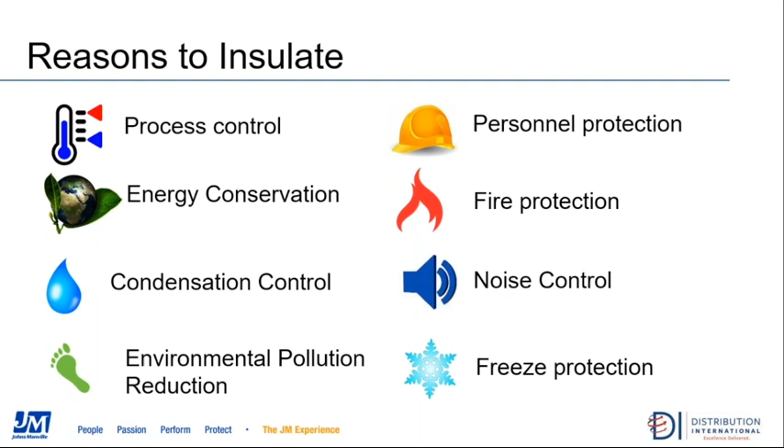That's also the reason why we have so many different products on the industrial side. If there was one product that did everything, man, we'd have it, but there is no silver bullet. So we have various materials because there is no one single product that will serve every single application. So we have to have a number of products because that's simply the way it is.

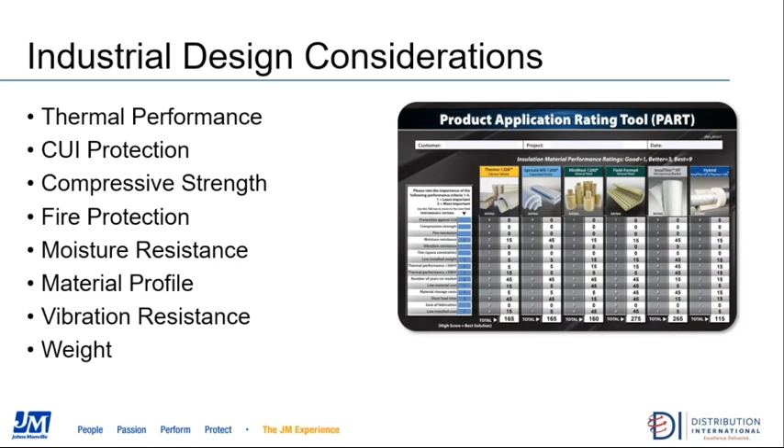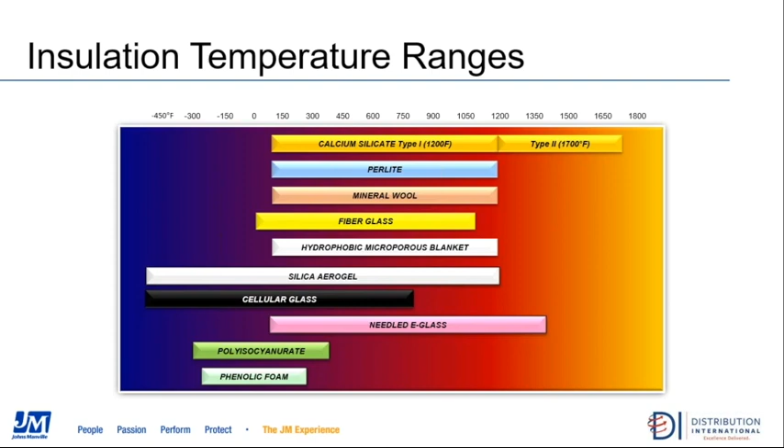This slide here is a chart that really illustrates pretty much all the industrial insulation materials available on the market today, from the cryogenics to the hot, and the top 5: calcium, perlite, mineral wool, fiberglass, and hydrophobic microporous blankets. Those 5 materials JM supplies in one form or another. And you can see we're not in the cryo side of the business. We are focused on the hot insulation products.

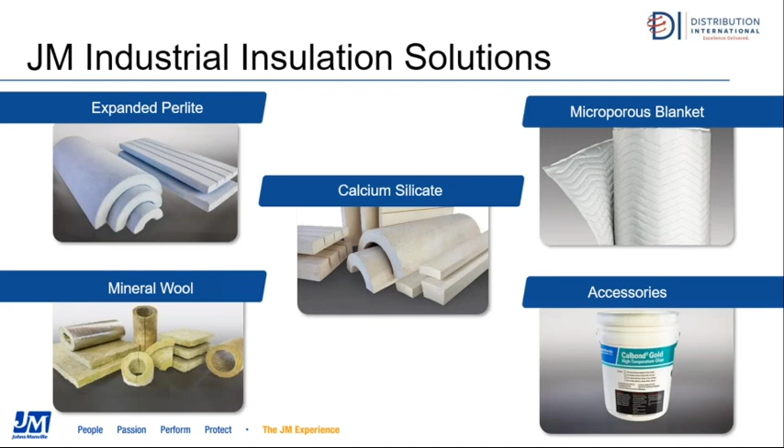So the products we offer are listed here: perlite, calcium, microporous blanket, various shapes and sizes of mineral wool, and we also have some accessory products, glues and cements.

So let's start with calcium silicate. Thermo 1200 is our flagship product. We've been in the calcium silicate business for more than 40 years, and we have two factories, Ruston, Louisiana, and Fruita, Colorado.

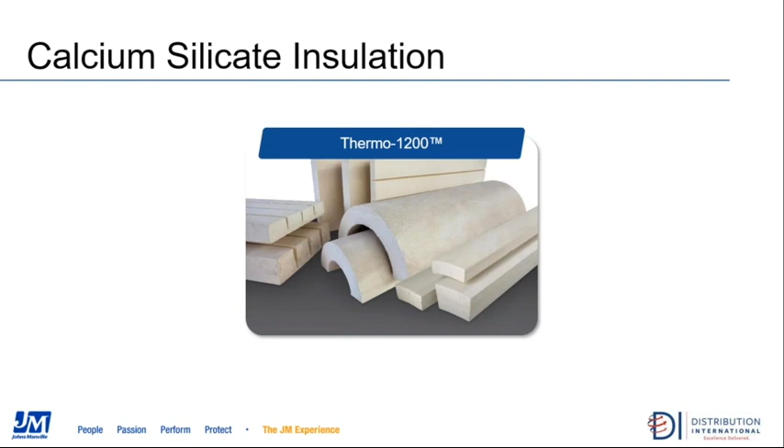The advantages of calcium silicate, historically, have centered on its strength, its compressive strength. It's the strongest material on the market today as far as being able to take a beating, to be stood on, walked on, which you're not supposed to do, but everybody seems to do. Its other advantage is consistent thermal performance, and you get that from compressive strength. If you don't reduce the thickness by squeezing or compressing it, you maintain consistent thermal performance.

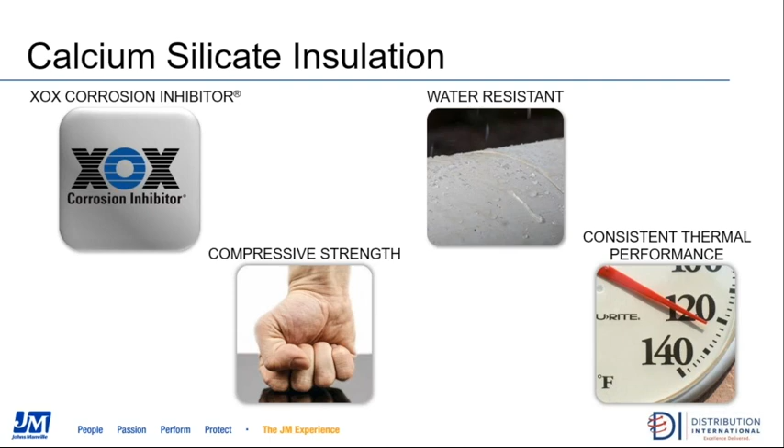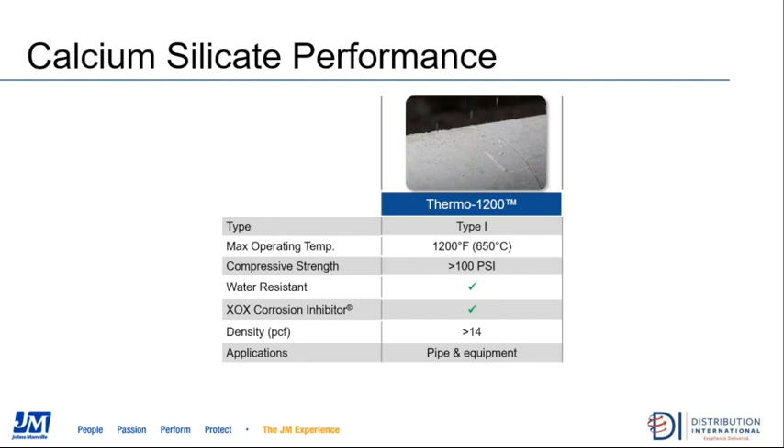Recently, we've added other advantages: a corrosion inhibitor, and most recently, we've made it water resistant. This slide is pretty much a summary of what I've already talked about. The only things I haven't mentioned are that all of our industrial insulation products are rated to 1200 degrees, and the density of Thermo 1200 is 14 pounds per cubic foot.

The insulators could always insulate a pipe faster than the metal jacketing guys could come behind them and install the jacketing. So particularly on the Gulf Coast, the afternoon comes, you get that 2 o'clock rainstorm, and the insulators are way down, far ahead of the jacket guys, and a mad scramble starts when the rain comes to put visqueen over it so it doesn't get wet. Job stops. It's a productivity problem.

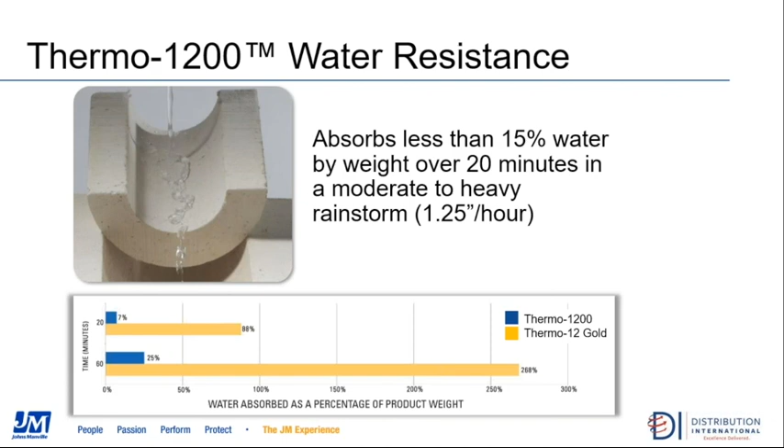So we've made it water resistant so it'll withstand a moderate rainstorm for up to 20 minutes and absorb less than 15% water, whereas prior to making it water resistant, it would absorb 88% water, which is what that first bar chart shows. This was a really significant advantage, designed for the contractors, but what we found is the engineers like it way more than I thought, and they're actually specifying water resistant Thermo 1200.

The other significant advantage is this corrosion inhibitor, which is in our calcium silicate. By the way, we don't make two calcium silicates now. You can't order it without the corrosion inhibitor, and you cannot order it without the water resistance either. We only make one, and it comes water resistant with the corrosion inhibitor. We don't make the old style anymore. The corrosion inhibitor is integral to the product.

Very simply, it provides a buffering layer between the pipe and the insulation, which inhibits corrosion from happening on the pipe. We have a whole 30-minute presentation that goes into great detail on how this actually works, but very briefly, it provides a buffering layer between the insulation and the pipe, so it breaks the connection that you need for water and electrolytes to contact the pipe to allow corrosion to happen.

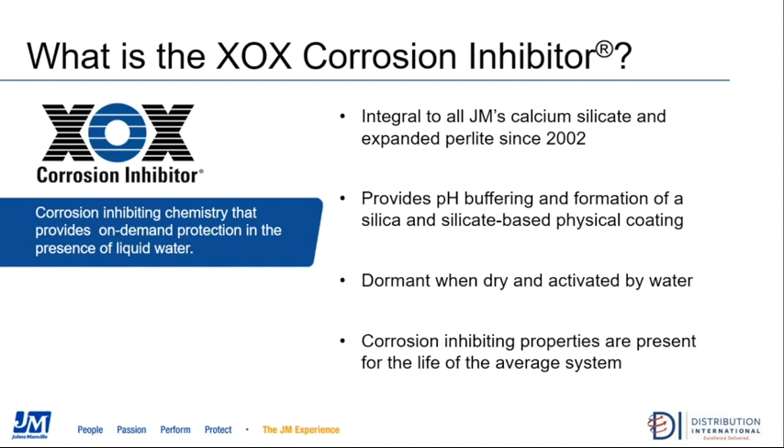This corrosion inhibitor is there for the life of the insulation installation. So if the pipe's insulated with Thermo 1200 for 25 years, that's how long the corrosion inhibitor properties are there. It doesn't wear out, it doesn't wash out, it's there for the life of the system.

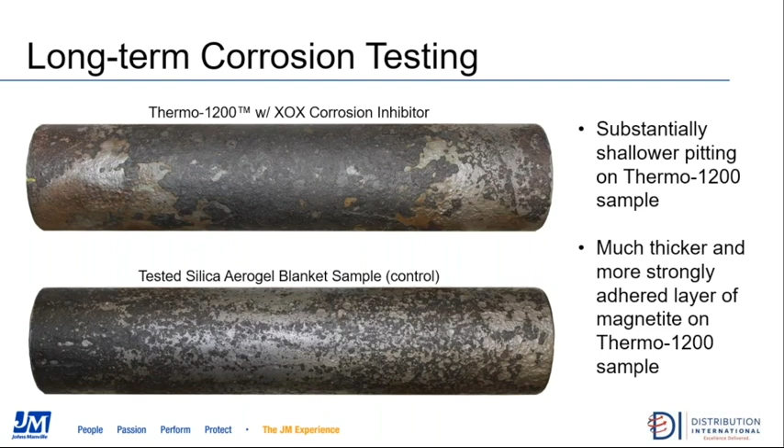These are pictures of some long-term testing we've done. You're going to see similar pictures throughout my presentation because we've done the same test for calcium perlite and our Insulthin blanket. This is 600 cycles, hot and wet, over a 6-month period. With corrosion, what you're looking for is how deep the pit is, because that's reducing the wall thickness of the pipe. The result is Thermo 1200 resulted in much shallower pitting than what we tested against, in this case, silica aerogel. That's the key, that's what everybody's looking for, that's what all the end users are interested in: the depth of the pit. So that's the big takeaway from this slide.

Next product, expanded perlite, which is our Sproule. And again, it's 1200 degrees, the upper temperature limit.

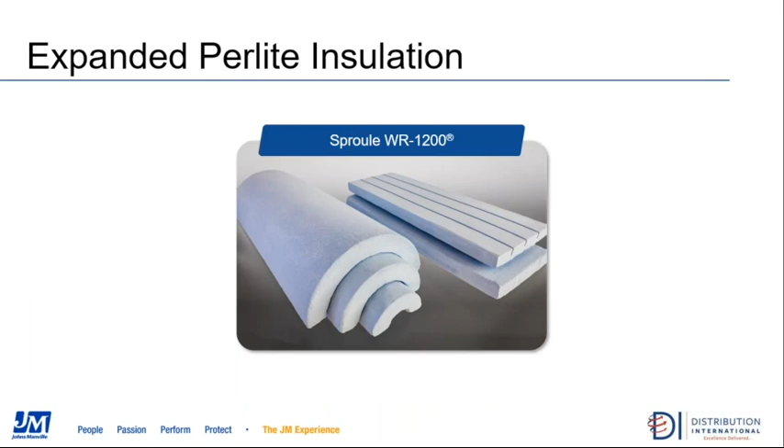Advantages are it's got the corrosion inhibitor and very good compressive strength, not as good as calcium silicate. This is 80 psi, where Thermo 1200 was 100. But this product is more than water resistant, it's hydrophobic, so it'll take more than a 20-minute rainstorm. You can leave it out overnight, 2 days, whatever. However, we recommend installing weatherproof jacketing on every insulation we have, regardless of what it is, whether it's hydrophobic or not. But this perlite is hydrophobic.

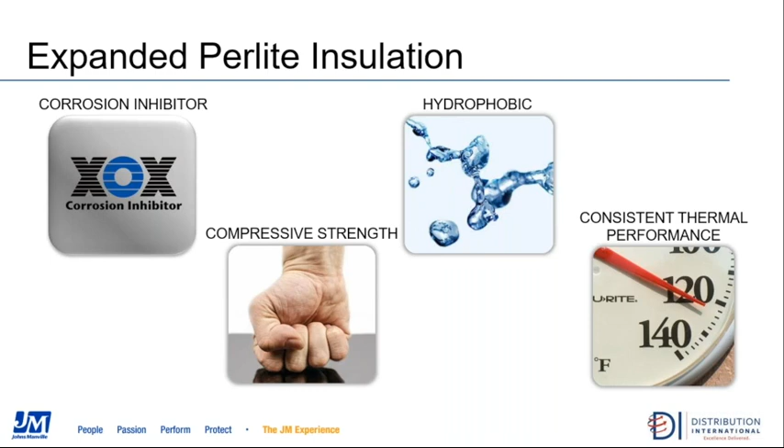The summary, I've talked about most of this already. Historically, it's been installed through the years on stainless steel piping because it's always performed very well with stress corrosion cracking, mainly due to the fact that it has a corrosion inhibitor in it and it's hydrophobic. Although now it's specified extensively also on carbon steel pipes.

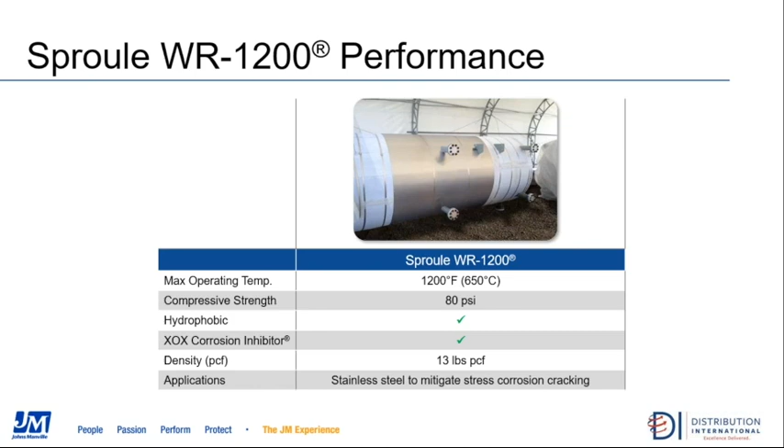Comparing calcium and perlite: one's hydrophobic, perlite; calcium is water resistant. You can see the compressive strength difference. The density is pretty close. The other difference is the calcium silicate has a lower, which means better, thermal conductivity than perlite. They're close, but calcium silicate's a little bit better. So depending on the operating temperature of the pipe, you might need 2 inches of calcium silicate and maybe 2.5 of perlite.

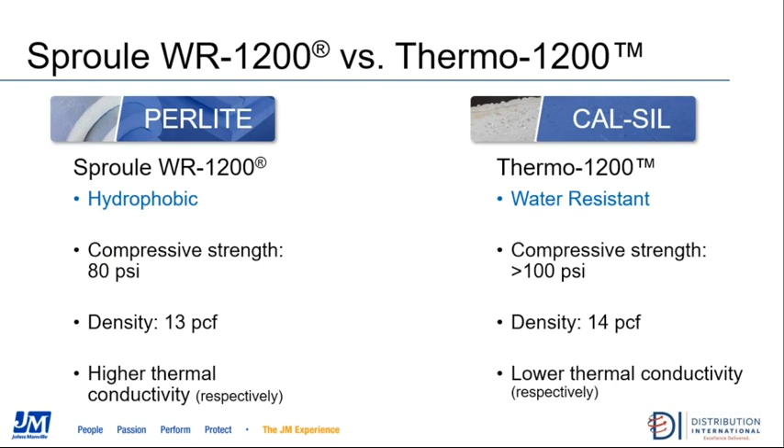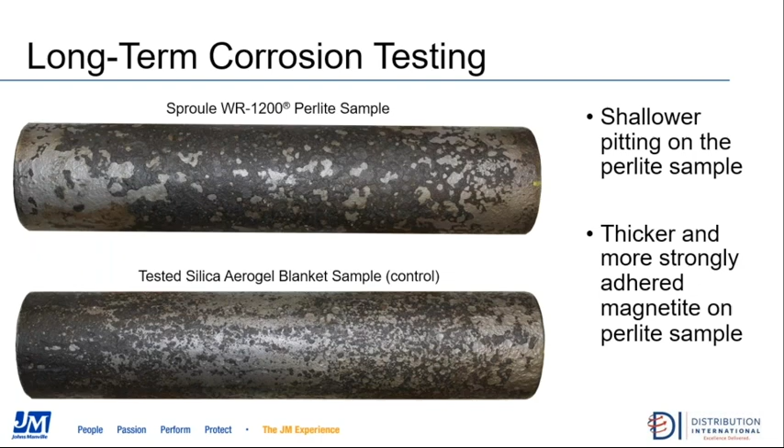Similar picture to what we just saw with Thermo 1200. Again, this is compared with silica aerogel, and the results were the same on this long-term testing. The pitting was much shallower, significantly shallower with perlite than we found with silica aerogel. And again, the pit is the loss in wall thickness due to corrosion.

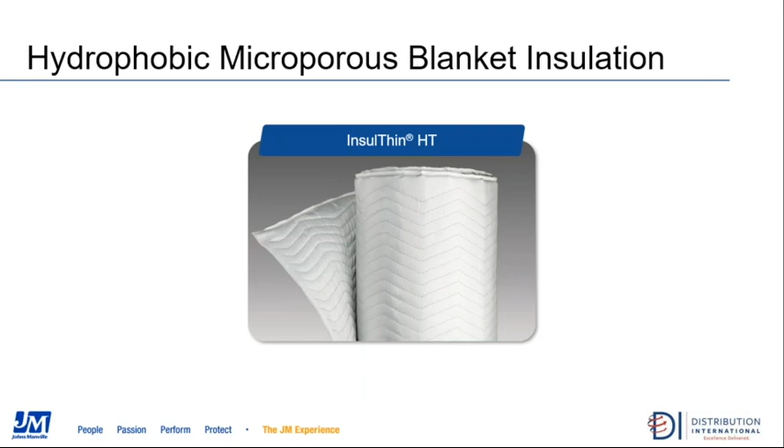Hydrophobic microporous blankets, that's a mouthful. We just call it Insulthin HT. This is a quilted blanket. It has fabric on both sides, so it's sewn together.

Thin, flexible blankets are really ideal for where you have space constraints. They're expensive, so you may not necessarily want to use them everywhere wholesale, but where you've got pipes that are very close together and you don't have room for 2 inches or 3 inches of calcium or perlite or mineral wool, these thin blankets are absolutely ideal.

They do have, or at least Insulthin has, a very low CUI potential. It is hydrophobic, and the other advantage is their thermal conductivities are extremely low, which is one of their great advantages, and that's why you can get by with a very thin profile. It comes 5 millimeters thick in rolls and 10 millimeters thick.

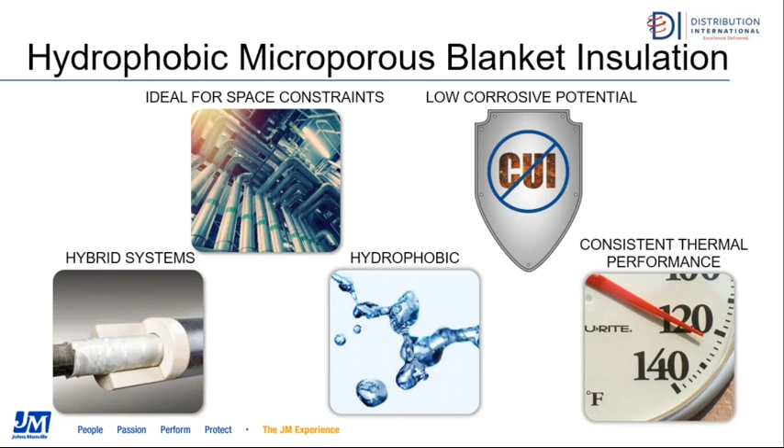They're also ideal for hybrid systems, so if you don't want to incur a huge expense of maybe 3 or 4 layers of the thin blanket because of its cost, and you have room, you can do a hybrid with maybe an inner layer of the Insulthin and an outer layer of a traditional insulation like mineral wool or perlite or calcium.

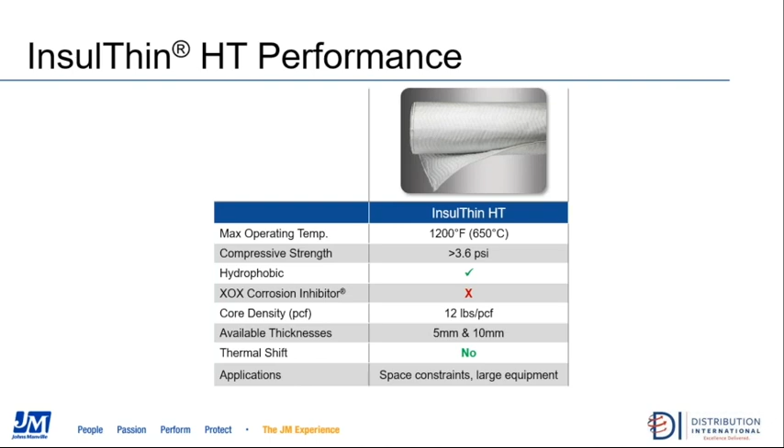And it does not have, I want to point out this thermal shift, which we are about to talk about, I think. Nope, not yet. Next. Kim's laughing.

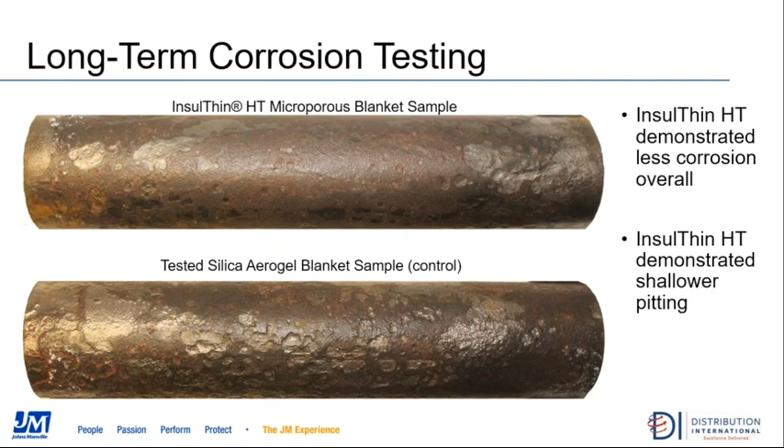This is the same kind of pipes. We did the same kind of long-term testing. Again, this was a 6-month test over 600 cycles, and much less corrosion overall compared to silica aerogel, and significantly less pitting. And again, pitting is the key, the depth of the wall loss. And again, if you guys want to see more on this, we've got several presentation modules that our sales reps or technical managers could come in and give you guys over a lunch and learn that can get into greater detail on all of this CUI stuff. But this is just a tease right here.

Here's thermal shift. What we found with silica aerogel, we test all our products for thermal conductivity. One nice thing about JM is we have this really nice technical lab, 350,000 square feet outside of Denver, full of PhDs and science guys. We test everything because it doesn't really cost us much. So when we get our products or competitive products, we test thermal conductivities because we have a thermal conductivity lab.

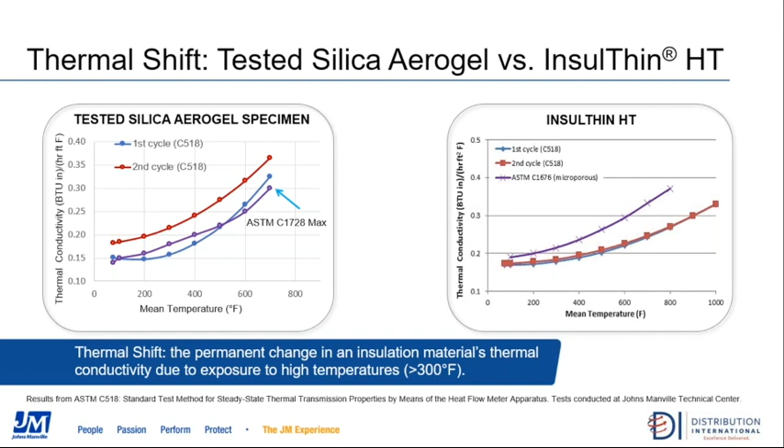It gets a little bit worse, and we understand the science of that, but I'm running out of time, so I'll get into that on our next webinar. But it's legitimate.

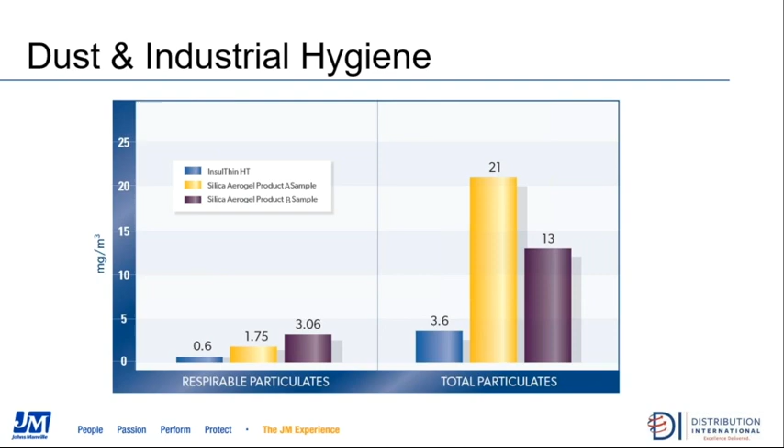It happens. We've got outside testing that supports this, and it's unique to silica aerogel, so just so you know that. We've also done dust and industrial hygiene tests on these thin blankets because they're made of granular materials, both aerogels and our microporous blankets. The Insulthin is the blue bar, and there are two types of aerogels available today in the market, sample A and sample B. The respirable particulates are from the monitor on the installer's collar, and the total particulates was the monitor above the work area, monitoring in the air. So it's evident that Insulthin is much better when it comes to workplace dust.

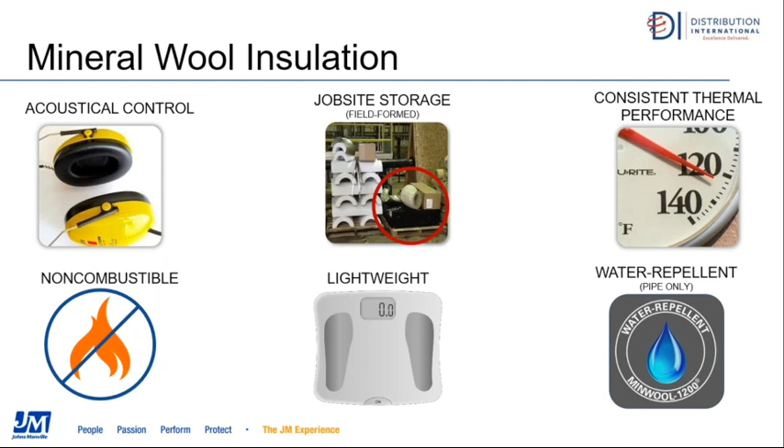Mineral wool has several advantages. It's very good with acoustics. The V-groove material, if shipped flat, you'll see it in the job site storage, that middle picture on top. What you're looking at there is two bills, the same bill of materials, two product forms. So shipped flat is a great advantage for filling trucks and also job site storage, taking up much less space. It's non-combustible, lightweight, with a density a little more than half the weight of calcium silicate or perlite. And our pipe insulation, as of last month, is now water repellent.

You can read this here. One thing, it does not have a corrosion inhibitor, so it doesn't perform as well as some of the other insulations in inhibiting corrosion. If we could figure out a way to put a corrosion inhibitor in mineral wool, believe me, we would. We just haven't figured that out yet. So that's one of its disadvantages.

But its other advantages are great thermal conductivity, better than calcium perlite, so it's a better insulator, and it's a lot more lightweight. It doesn't have the compressive strength, which I think might be the next slide.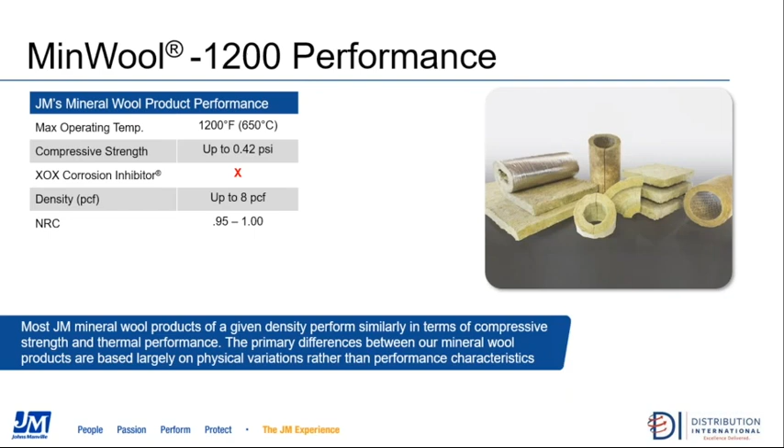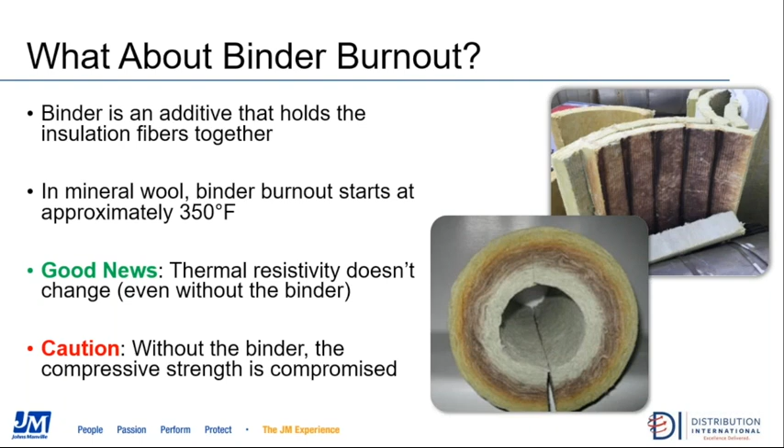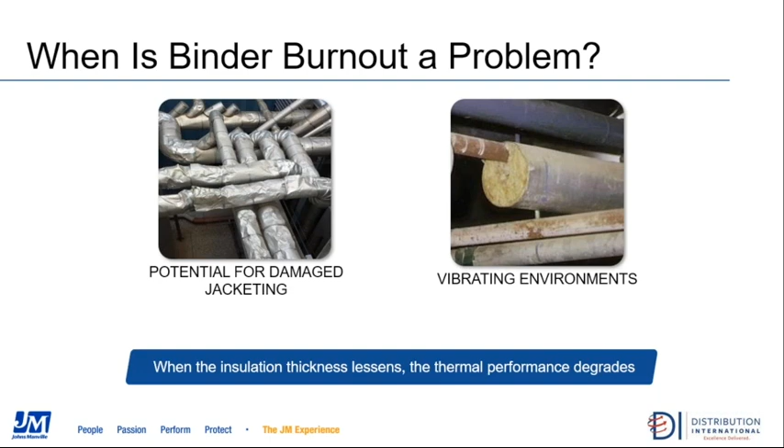No binder. So one of the things mineral wool does have, because it's fibrous, is an organic binder. Organic binder means at temperatures 350 and above, it's going to start to burn out. The good news is the thermal conductivity doesn't change without the binder, but the binder is what holds the fibers together, so the compressive strength may be compromised. Also, in any environments with high vibration, where there's no binder holding the fibers together, the fibers will tend to settle, as you'll see in the picture on the right. So that pipe is very well insulated on the bottom, but not so much on top anymore, because the binder wasn't there to hold the fibers in the high vibration environment.

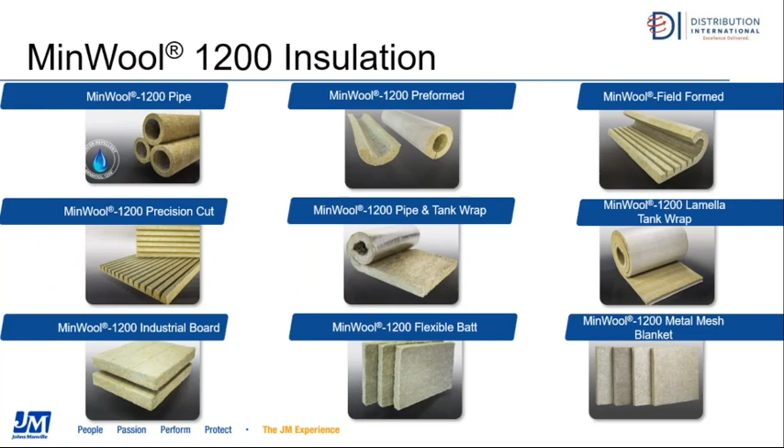Circling back to Sybil's question: she says, I had an engineer ask if this is a good alternative to the CalSil for fireproofing. I told them no. She gave the right answer, mainly because we have not tested it to UL 1709, so I have nothing to support that it would be.

We have another question from Susan. Why don't you add adhesive to precision cut mineral wool? Because we have adhesive on field formed mineral wool. We would rather not make precision cut, but we have customers who actually want to order it. So that's the only reason we make it. Somebody wants it.

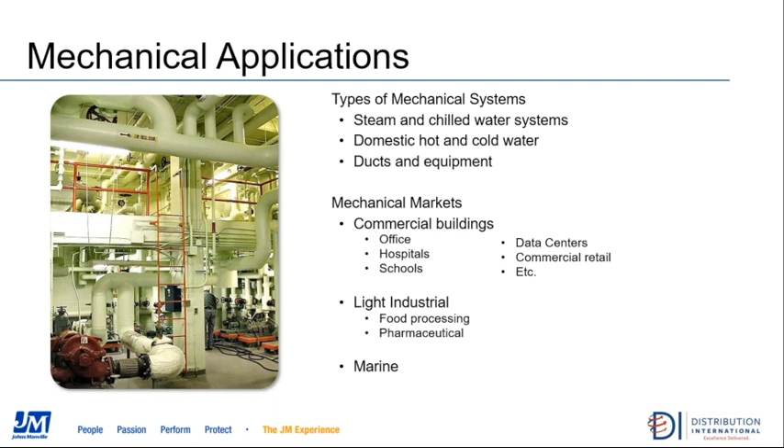And then the mechanical insulation products can end up in some light industrial applications like food processing or pharmaceutical, and marine as well. So we'll cover all of that.

So from a design consideration standpoint, engineers are going to be thinking about things like the system, what is the ambient temperature that it'll be operating in, what are the relative humidity conditions, and what kind of surface temperatures need to be considered. For a hot system, it's likely personnel protection - how much insulation given the system and the conditions of the air do we need to keep people safe, to make sure they're under the 130 degree general temperature range. Or for a chilled system, you have to make sure the surface temperature is above the dew point.

In terms of fluid delivery, they're considering things like the length of the run, the velocity of the fluid moving through the system, and really where the end temperature needs to be when the fluid's delivered.

So there are some tools that can help with this. NAIMA has a program called 3E+. It's on their website that lets engineers calculate these kind of things. Or you can contact Johns Manville - we have it with our data loaded into the system, and we can help engineers do the calculations for their particular circumstances.

And of course, spacing is critical. Obviously, Jack touched on it. If you lose thickness in insulation, you lose performance. So there has to be enough room to allow the insulation to not be compressed.

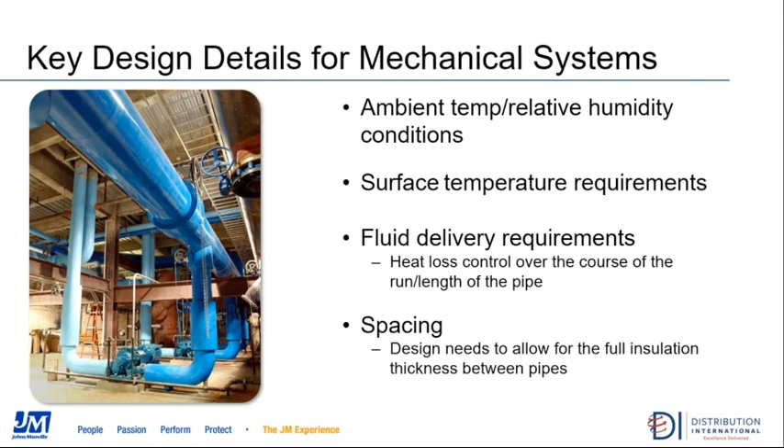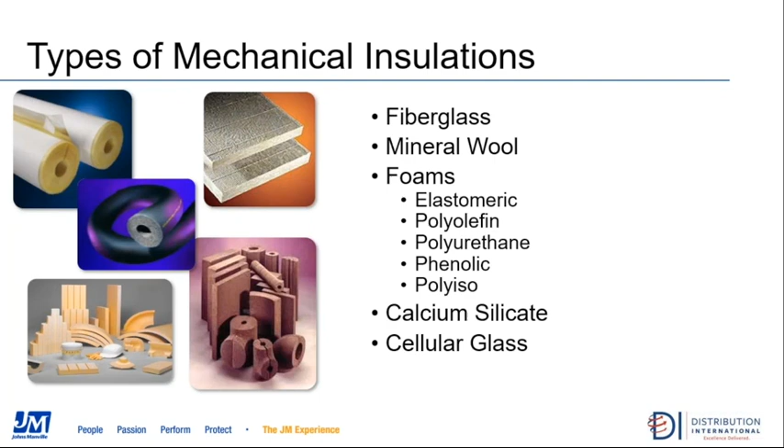So we're going to talk a lot about fiberglass insulations, but there are other types. Jack covered mineral wool and calsil - both can end up in mechanical systems. There are quite a few different varieties of foam, things like elastomeric rubber with the black flexible style of insulation. There are polyisos we'll go a little bit into. And then there are some applications where you'll see cellular glass. Maybe you're looking for an incompressible material, zero perm, something like that would drive the demand for a cellular glass.

So let's talk a little bit about fiberglass pipe and insulation boards. These products deliver on the temperature control, energy efficiency, and they do that by creating really small air pockets within the insulation. And these air pockets limit conduction and convection, and that's how really you're delivering that thermal performance. It's also the aspect that delivers the acoustical performance, so that system is going to absorb the sound waves and provide some acoustical benefits.

With the help of a vapor retarder jacketing, you can also have condensation control. So with pipe insulation and boards, these come in a variety of pipe sizes and wall thicknesses. And for the boards, they come in densities and thicknesses that we'll go over in just a moment.

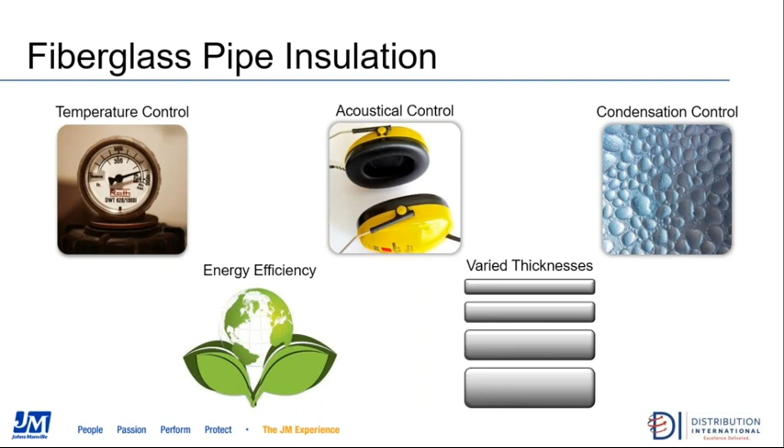So Johns Manville's pipe insulation is the Micro-Lok HP line. There are two jackets associated with that. The Micro-Lok HP is an ASJ jacket, which stands for All Service Jacket. That's a white bleached kraft paper on the outside, scrim reinforcement, and then foil that faces the insulation, providing that vapor barrier. So this product has a perm rating of 0.02, low being better. So it does resist the flow of moisture quite readily and is considered a vapor barrier.

Micro-Lok HP Ultra is similar. The jacket, instead of being 3 layers though, is 4. The outer layer is a polypropylene coating, and for Johns Manville products, that Ultra designates a polypropylene. It does have the traditional craft paper, scrim reinforcement, and a foil inlayer, giving you the perm rating. For this product, it's 0.01, so it's a little bit better at preventing the drive of moisture. The product lines are good to 850 degrees, and they have good K values at 0.23. Low is better, so it's quite a good insulator.

We do have an unjacketed version that's typically used in light industrial. It's the same as the other two products, but it just does not have a facing.

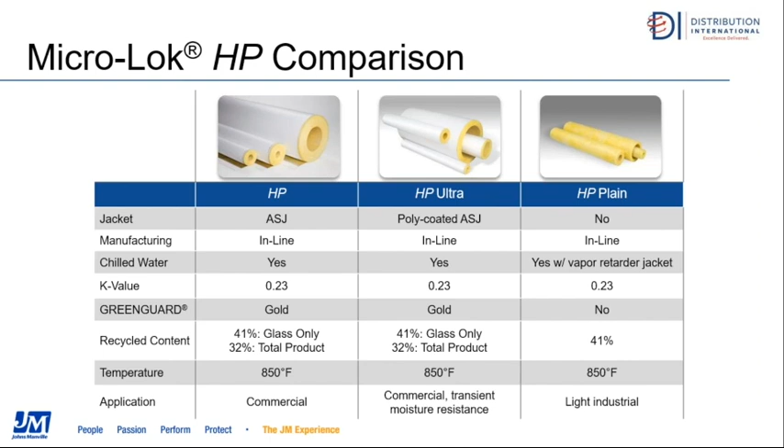So fiberglass boards come in a number of varieties. The 800 series is the most common commercial application. It's good to 450 degrees. Comes in densities as light as 1.5 pounds and as heavy as 6 pounds. Generally, you're looking for a little bit better thermal performance with the heavier density products, and could be a little bit better acoustical performance as well with those heavier products.

There are 3 jacket styles available for this product line. We have the FSK, which is a foil scrim kraft. In this case, the foil is facing out. That is what's giving you your vapor retarder at 0.02 perms. And it has a reinforcing scrim with a craft layer of paper facing the product.

Also comes in ASJ, which is similar to Micro-Lok HP, same arrangement. And we do have an Ultra version for Spin-Glas, but in this particular case, the Ultra does signify polypropylene, but there is no paper in this. It does have this scrim reinforcing layer, and it's got a metallized polyester, so it doesn't use a foil to create its vapor barrier. But it has similar performance at 0.02 perm, so a good vapor retarder.

1000 series and precip are light industrial fiberglass board products, good up to 850 degrees. The main difference is their densities. 1000 series is 3 pound, precip is 2.4. The precip then is a little bit more of an advantage if you've got an irregular shape or a large tank. You can bend this insulation slightly and conform to that shape.

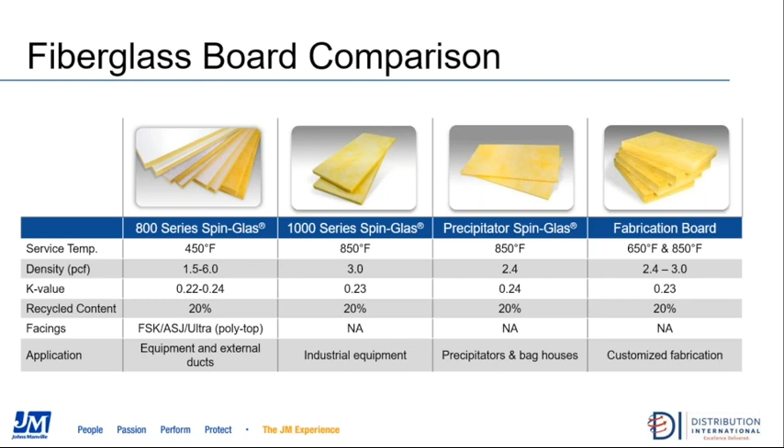That's all I would say on those, Kim.

So let's talk about polyiso foam board. We do have a polyiso insulation. It has the same thermal performance and energy efficiency attributes that fiberglass does. It is, however, a little bit better insulator. It's got a K value of 0.17, so better than fiberglass, which is at 0.23. It's very lightweight and has a high compressive strength when compared to fiberglass. We'll talk about that in just a moment. And it is a closed cell insulation, so it does inhibit the intrusion of moisture.

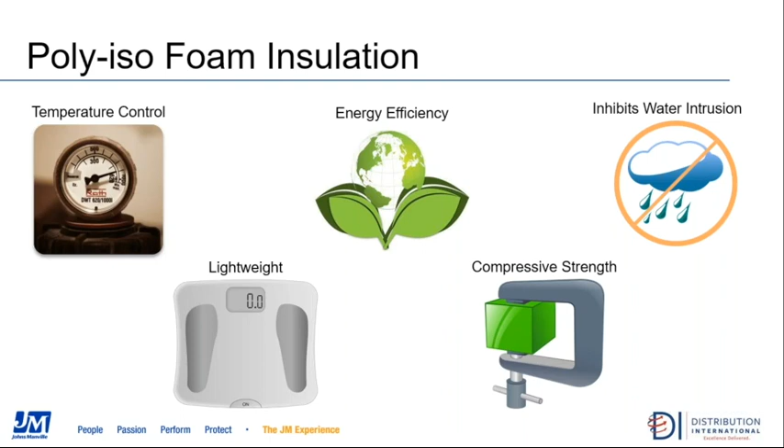The product line for us is XSPECT ISOfoam APF. It is a polyiso board with 2 jackets, both a foil jacket on top and bottom. The thicknesses range from 1 inch to 4 inch. It gives you an R range from R6 to R26. The surface temperature range also goes lower than fiberglass at -100 F, but it's limited to 250 on the hot side. The biggest drawback to this product line is going to be in its flame and smoke development.

Flame is pretty good at 25, but it will smoke in a combustion setting, so it has a rating of 450. Often inside of a commercial building, you're going to see a spec that calls for 25-50, which would then exclude this product.

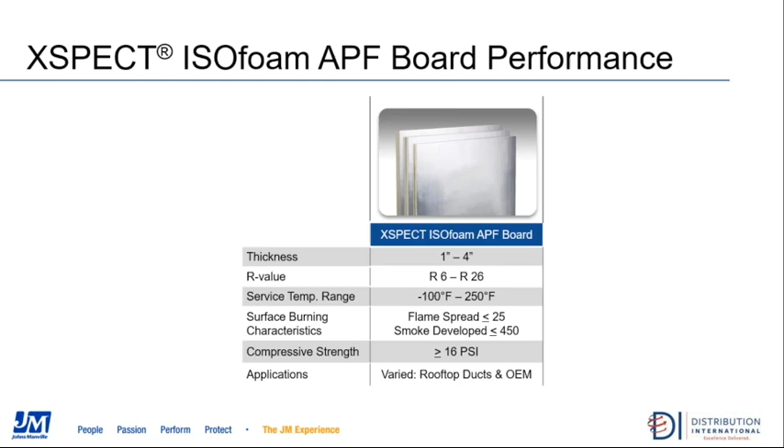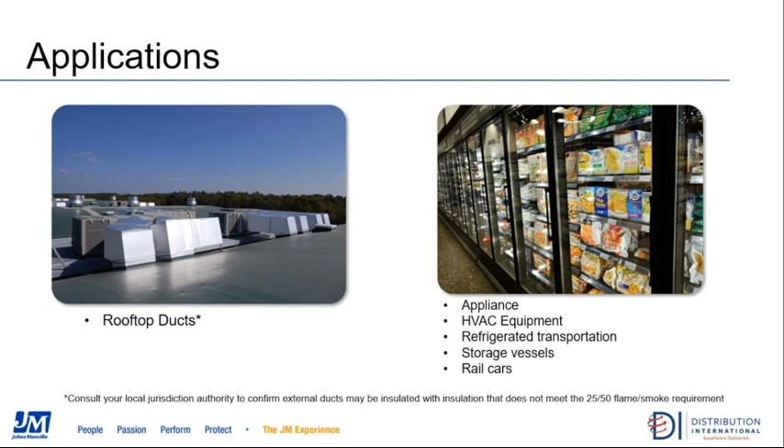So typical applications for us is going to be a rooftop application. That flame and smoke development issue is generally not a concern on the exterior of a building. Of course, the local code body has the authority there to make that decision, but when they allow it, polyiso is a very good rooftop duct. For OEM applications, it could be in appliances or equipment. Generally here you're trying to take advantage of the very good thermal performance to reduce the need for space dedicated to insulation.

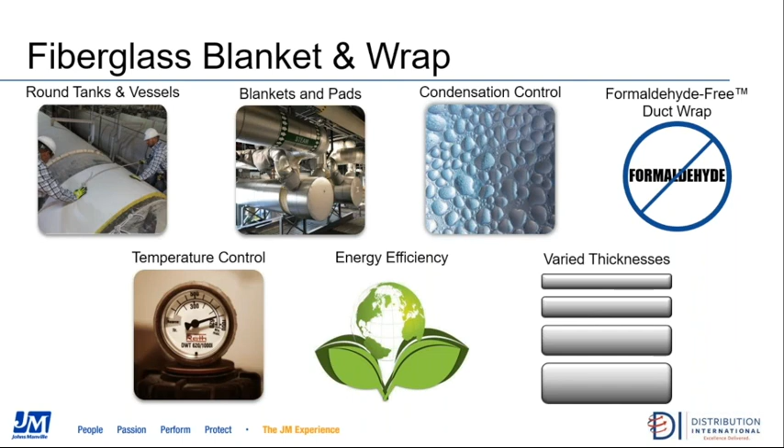So let's talk about the fiberglass blanket and wrap. These are generally used in situations where you need some flexibility from the insulation. It's going to be used on large round tanks. There are some products used in removable blankets and pads, and it delivers the same kind of performance that the insulations we've been talking about. One feature that's a little bit different, which we'll talk about in the duct wraps, is the product can be provided in a formaldehyde-free version.

Our pipe and tank insulation is called Microflex. It comes in two different facings, FSK and ASJ, which I already talked about, so it's the same configuration as the boards. This product is board-like in its compressive strength, but because of the fiber orientation it does allow for some flexibility on large pipe and tanks. That's what makes Microflex unique.

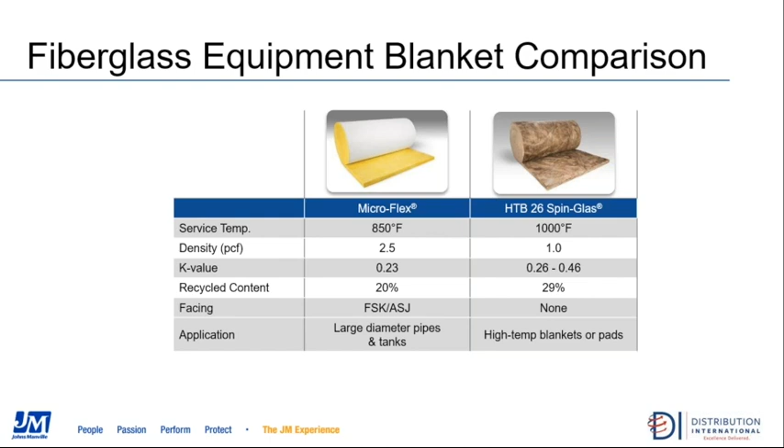HTB 26 is a very high temperature fiberglass product, up to 1,000 degrees. It's most often used in some sort of removable pad. It does have a Coast Guard designation, so it could have some marine applications as well.

For duct wrap, we have three facing varieties. The primary product line is Microlite FSK, again that foil scrim kraft style facing. It comes in densities ranging from 3/4 pound to 1.5 pounds, which drives your K value and gives better insulation performance at higher density, and it has a good perm rating from the FSK of 0.02.

If you have an application that's going to be exposed and there's high sensitivity to aesthetics, we have a couple of facings that might work. We have a white PSK, and we're about to launch a black version of PSK later this year. They have very similar thermal performance to Microlite FSK, but for areas that require a certain look, these PSK facings are what your engineers may be looking for.

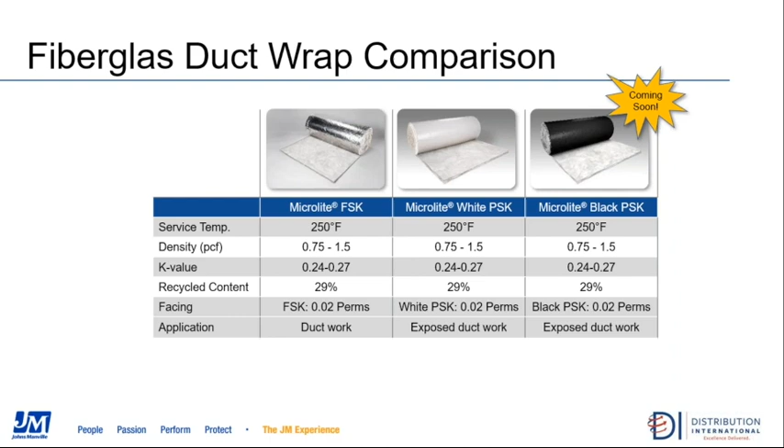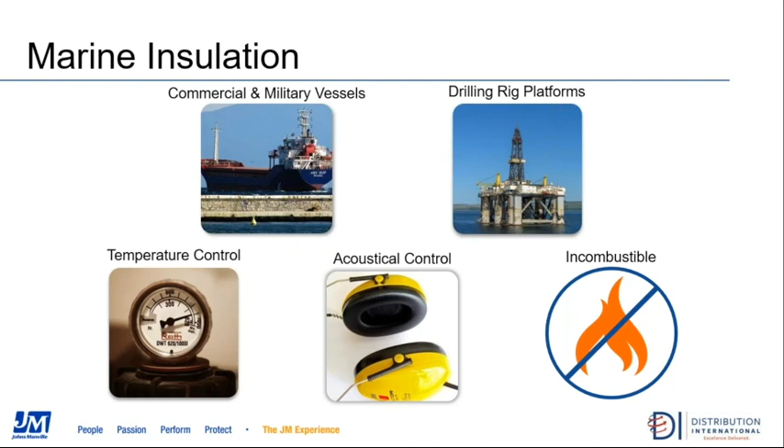In terms of marine insulation, we're insulating commercial or military vessels, could be an oil drilling rig or something along those lines. It provides the same kind of features as other insulations we've discussed, temperature control, acoustic control. But a unique feature of marine products is they're generally considered incombustible, as fire is a large concern in marine applications.

So we have three marine insulations. First, incombustible hull board, which is what it sounds like, used in the hull of the ship. For us, we're just the insulation supplier. We have several distributor locations that do the finishing work, putting some sort of facer on these insulations, and it's really that composite that meets the Coast Guard requirements or specific ship requirements. So it's always in partnership with a fabricator when our products are used.

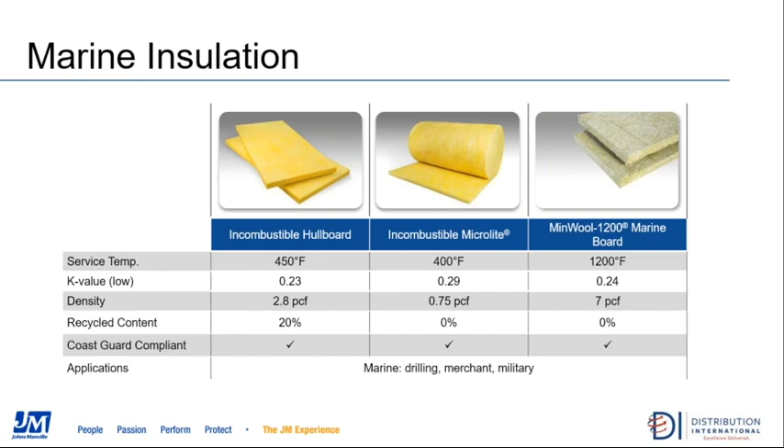We also have a light density product, incombustible Microlite, which could be used in the HVAC systems of the ship. And we have mineral wool as well, which handles higher temperature and is quite good acoustically, particularly at low frequencies.

Let's talk a little bit about our PVC systems. Here, as opposed to insulation where you're looking for thermal and acoustical performance, we're talking more about increasing resistance to abuse, or addressing some sort of aesthetic component. These are very good looking systems when installed, and color in particular can be used to identify the materials flowing through the pipes.

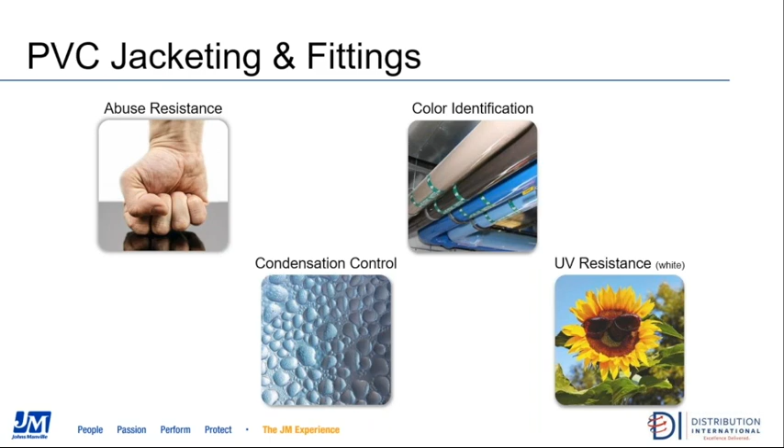PVC is also considered a vapor barrier. It has a perm rating below 1, so it can contribute positively to condensation control. The white PVC also has some UV resistance, which allows it to be used outside.

For JM, we have two primary styles of PVC fittings. We have the 2000 series, which is your commercial grade, nominally 20 mils thick, coming in white or a variety of colors up to 13. Zeston 300 is a heavier gauge, nominally 30 mil, used in high abuse areas or maybe a USDA wash-down setting, like in a food processing plant where they want to wash down their own systems. These 300 series fittings can stand up to that.

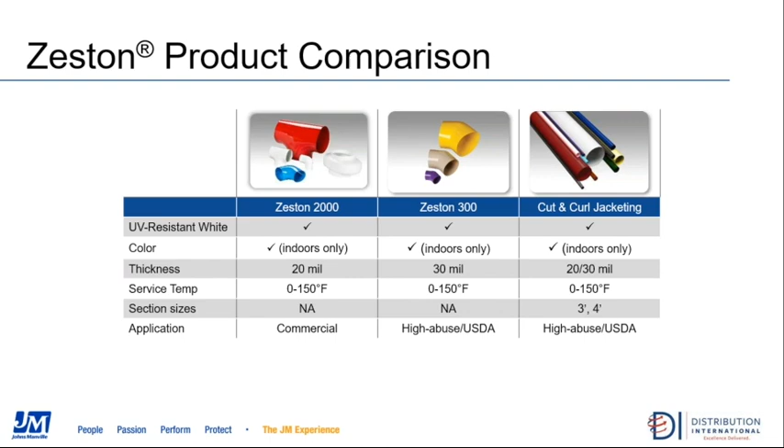There's also a jacketing system for us, cut and curl jacketing. It comes in 20 and 30 mils, matches the colors from the fittings, and is 3 or 4 feet in length. It could also be used in that high abuse setting if purchased in the 30 mil thickness.

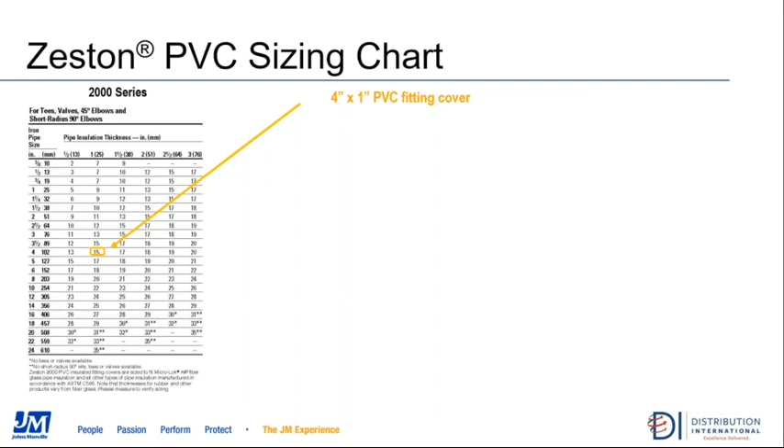One of the things that can be challenging for somebody new is just sizing up the right fitting for the application. So here we've got a picture of our sizing chart. On the left-hand column you have pipe insulation IDs, and on the top row you have insulation thicknesses. Here we've got a 4x1, so 4 inch on the ID and 1 inch in the wall thickness, and where those rows and columns meet you see the number 15, which is how you identify the right size for that application. The reason we do that is because the fittings will fit a number of different combinations.

So when you buy a 15, it will work for 3 or 4 different combinations, which adds to the versatility of the product line.

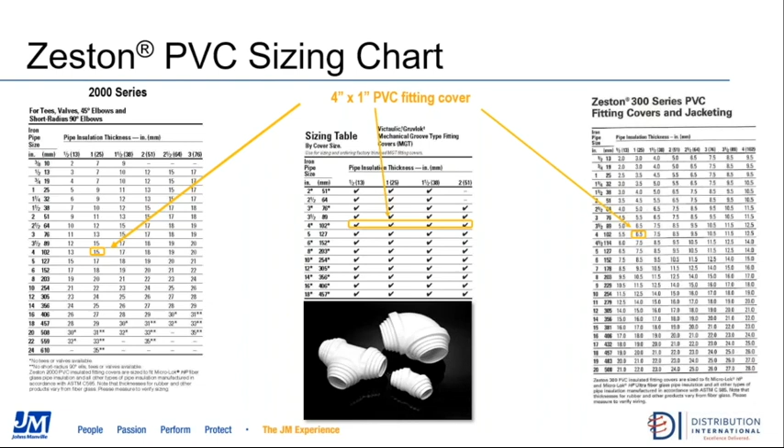The 300 series, the heavier gauge, is similar to the 2000 series. You identify the size the same way, but here you're just designating the outside diameter. In this case, it's a 6.5 300 series fitting that you'd be looking for.

In terms of the product offering, we have a PVC fitting for likely most any situation you run into—well over 2,000 combinations, ranging from elbows, T's, couplings, to Y branches. If you run into something you're not sure we have, reach out to us and we'll let you know.

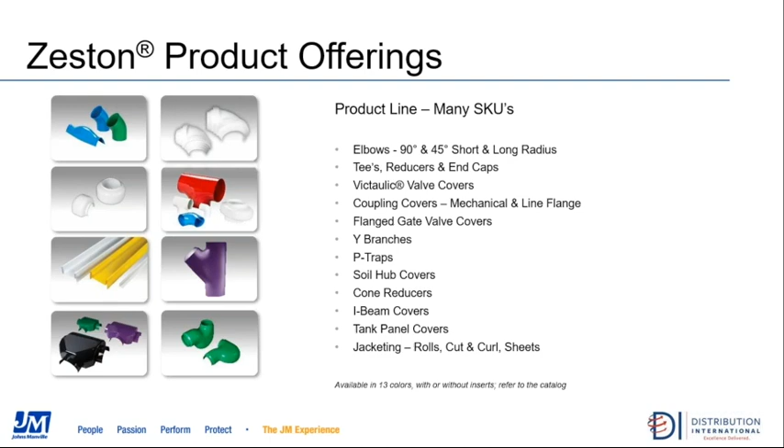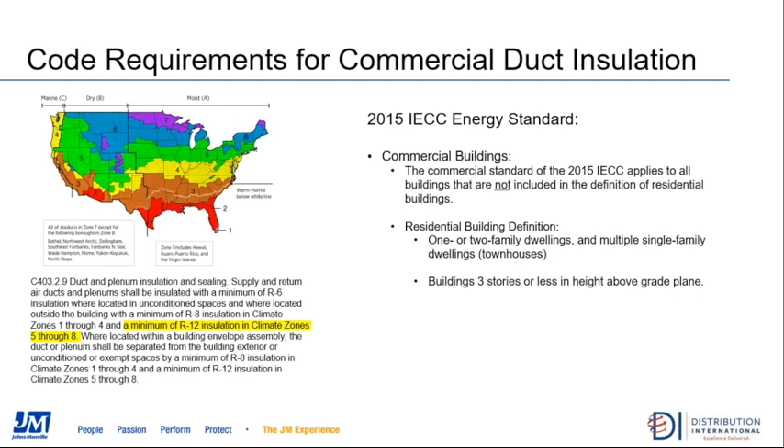We do have a couple of new products driven by code changes. The IECC, the International Energy Conservation Code, has determined that for locations in the northern portions of the United States, outside the building envelope or an unconditioned space, they're now calling for R12 insulation. This is, again, for commercial buildings, so in those settings you need insulation that can meet the R code requirement.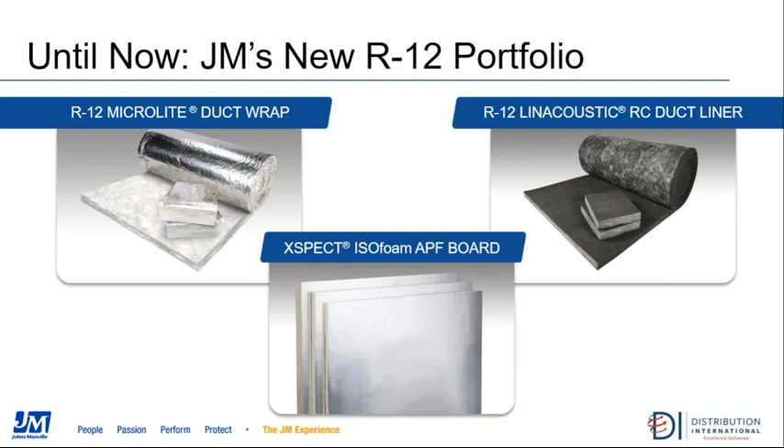We've got 3 new products specifically for this code. We talked about XSPECT, that's R12 at 2 inches. We also have Duct Wrap, a Type 75 or 3/4 pound insulation at 4.4 inches thick, which is R12 compliant. And for insulation that goes inside the ducts, Linacoustic RC is a 3-inch product that also complies with an R12 rating.

So Kim, I'll turn it over to you to talk about our training tools and then field questions.

Thanks, Lance. We offer webinars just like this one today about broader topics, talking less about our products specifically and more about main issues that impact the industry. Jack talked a lot about thermal shift and CUI, and Lance talked about condensation control. Every month or so, we host a new webinar covering topics like these.

There's also a list of our products. This is pretty handy for anybody just learning what we offer—it's a short one-sentence description of each product and what makes it unique. For example, if you're looking for the difference between Micro-Lok HP and Micro-Lok HP Ultra, you'll see that Ultra has that polytop coating.

Additionally, there are tools—Lance mentioned the NAIMA 3E Plus tool, which is available online. We also have the pipe tool you saw in Jack's presentation, which is also available on the Source.

Finally, we have online training, a great tool for anybody looking to get their feet wet—the JM Academy. This gives you an introduction to our HVAC and mechanical installations, details on what you need to know to specify and install the material, and additional information, including details on the proven safety of fiberglass, going through the research on the health and safety of fiberglass installation.